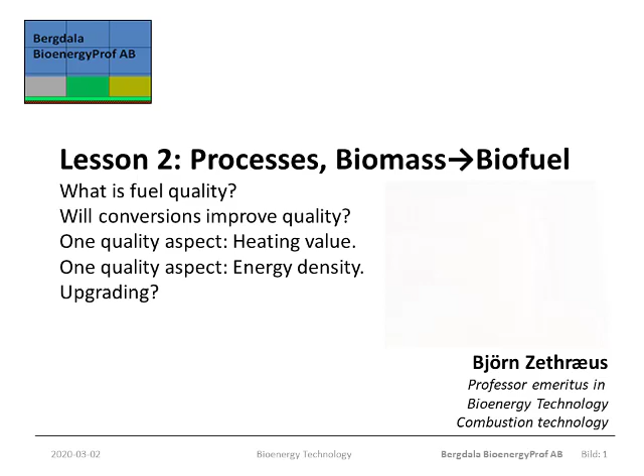So in this nugget we will discuss fuel quality, and especially we will talk about the heating value and the energy density. When you looked in the UBET report in the previous lesson, you will have noticed that there is no specific definition of fuel quality. And that is because there is no such thing as a unique measure of fuel quality. Page 6 in the UBET report will introduce the problem to you.

In the last paragraph on that page, you will read that a major motivation for quality assurance is to fulfill legal limit requirements or to meet technical demands for the power plant. To guarantee these basic conditions, chemical and/or physical parameters may be varied theoretically by crop production processes as well as by harvesting and preparation. Now, to summarize this, we may say that fuel quality is a measure of how well the fuel is adapted to the end-user process demands.

A cheap biodiesel containing paraffins may be a high-quality car fuel in a tropical climate, but not in the Arctic or subarctic region. And that would be because the paraffins will condense and clog the engine at low temperature. Wood pellets is a high-quality fuel if you want to heat your house using a boiler, but not if you want to run an aeroplane.

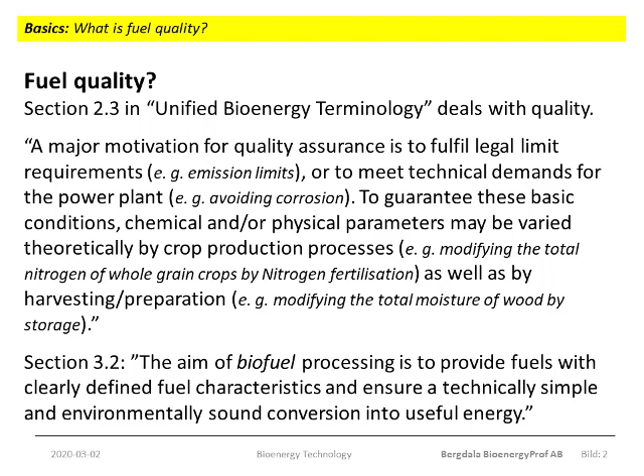The thing is that biofuels are so very diverse. Look back at figure 3 and figure 5 in the UBET to refresh your memory. And then, if you go on to section 3.2, page 11, you will read that the aim of biofuel processing is to provide fuels with a clearly defined fuel characteristic and ensure a technically simple and environmentally sound conversion into useful energy. So what we will do now in this nugget is to concentrate on one important fuel characteristic, namely the concentration of chemically bound energy.

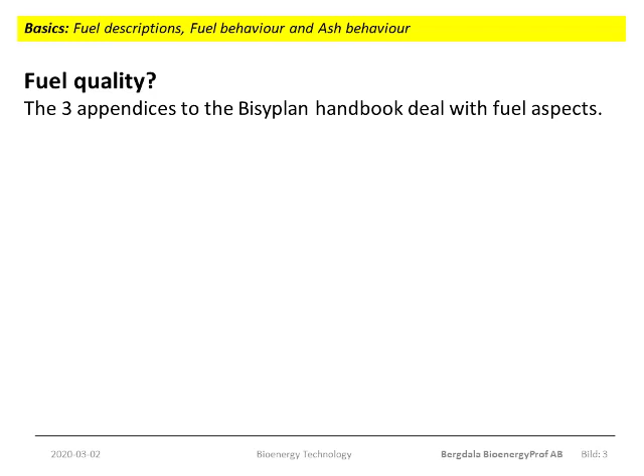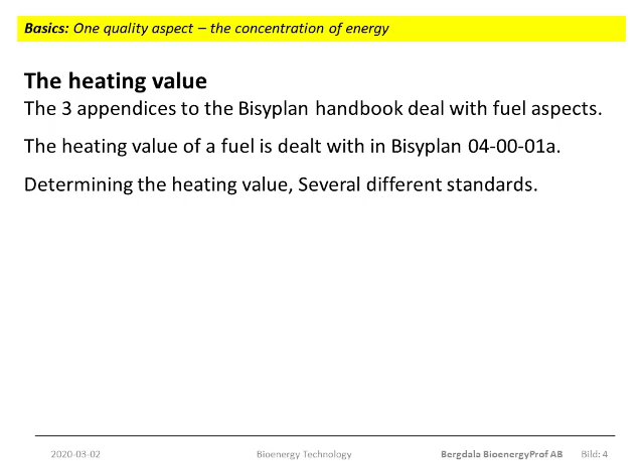But first of all, let me remind you that the Bisyplan handbook appendices deal with fuel descriptions and different aspects of fuel behavior. So, now for the heating value. There are different standards to determine the heating value depending on if the fuel is gaseous, liquid or solid. But there are common and basic things.

First, all standards basically use a bomb calorimeter. In this apparatus a specific amount of fuel is inserted. Then enough oxygen is added to guarantee that all the fuel can be completely burnt. The calorimeter is an enclosed volume that can be maintained at about a constant temperature, typically 25 degrees Celsius.

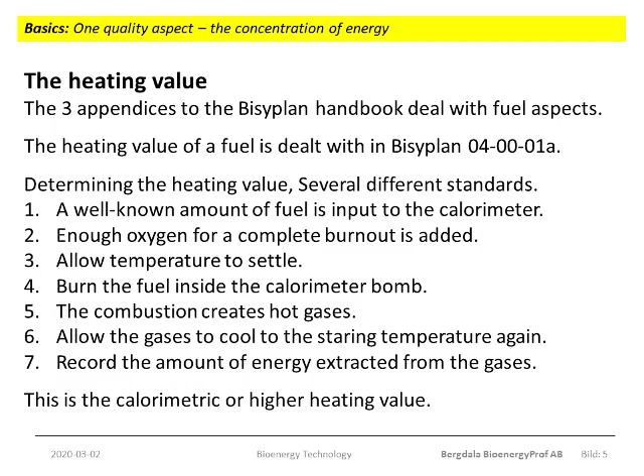The fuel is then ignited and the combustion products are cooled to the starting temperature again. And then the amount of energy extracted from the combustion products is recorded. The procedure becomes slightly different depending on the state of the fuel, but basically this is how it is done. Let us now look at this a little bit in more detail.

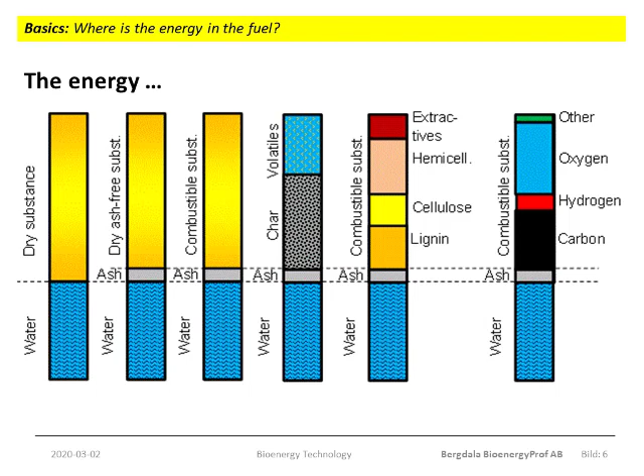Because what happens is that the liquid water in the fuel boils off to form steam, and that will take energy. In the calorimeter the process is started at 25 degrees Celsius, and it also ends at 25 degrees Celsius. When ignited, the combustibles in the fuel will form hot gases, and then the water vaporizes. This requires energy. The energy need is proportional to the water content in the fuel.

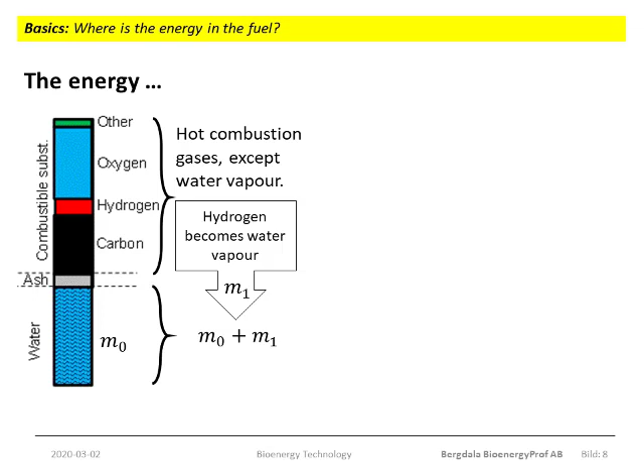The hydrogen in the fuel becomes water vapor during the combustion. So the mass balance for water shows that the total amount of water vapor is bigger than the moisture content in the original fuel. So we count this water vapor together with the vapor from the fuel moisture. But then the whole thing is cooled again. So what we have after that is cold gases and condensed water.

But the amount of water is now bigger than the amount of water we had from start. So the heat released from the condensation is bigger than the heat required for the vaporization. So let us now look at the heat balance.

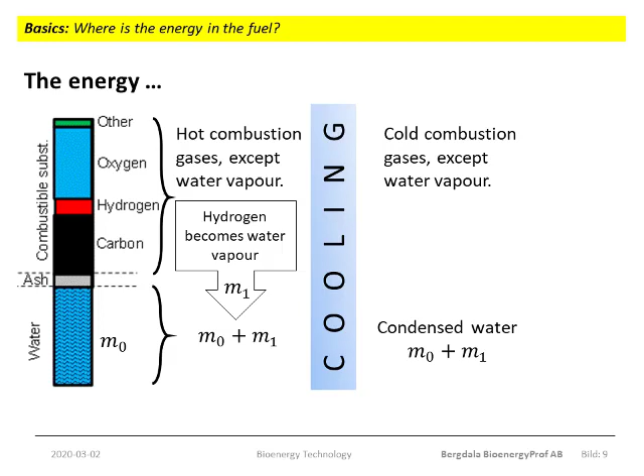As you will see from this slide, the experimental value will give as a result a total energy release from the calorimeter that is higher than the energy contained in the combustible substance. Expressed per mass unit, joules per kilo wet fuel, this value is called the calorimetric or higher heating value.

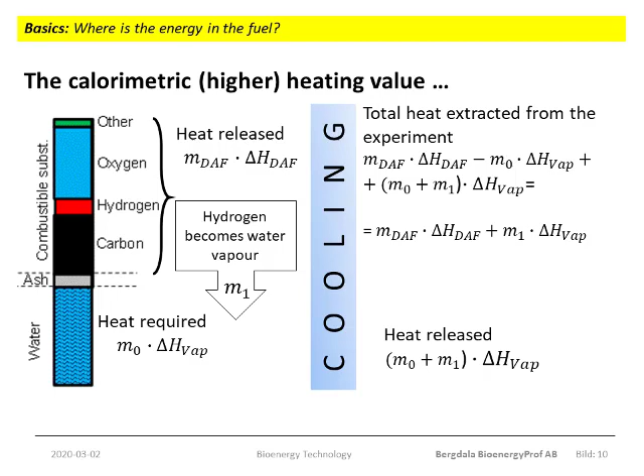This is the amount of energy that could be extracted at the most in case all the water vapor in the combustion gases was condensed and all the condensation heat made use of. But in most real cases the combustion gases will leave the plant in the form of gas, so the cooling is much less. And in that case, there will be no release of condensation heat.

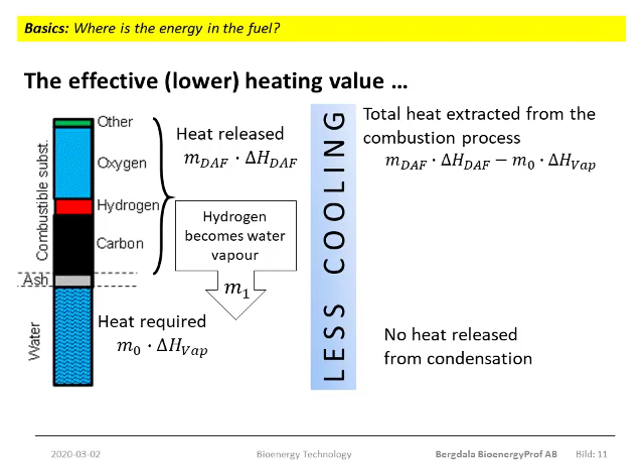Expressed per mass unit, joules per kilo wet fuel, this value is called the effective or the lower heating value. This is the amount of energy that can be extracted at the most in case the combustion products all leave the plant in gaseous form, and this is the normal case. So this is how the experiments in bomb calorimeters can be evaluated.

Different countries tend to have different traditions with respect to these two heating values. Some countries use the higher heating values, others tend to use the lower heating value. In Scandinavia, we always use the lower heating value. So if I say the heating value without any specification, I always mean the lower effective heating value.

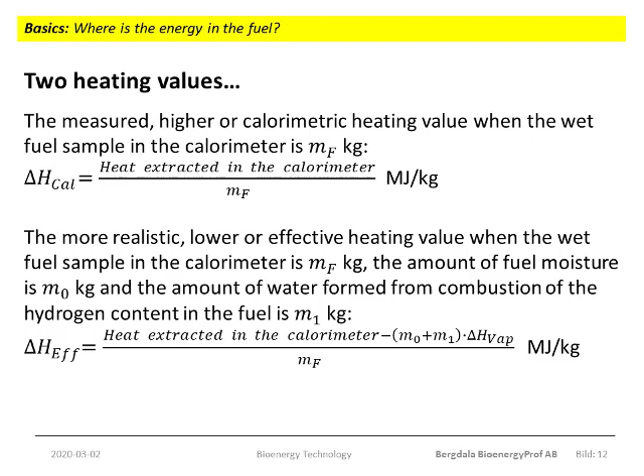And let us now look closer at the equations we have found. What I've done here is to replace the numerator in the two equations from the previous slide with the more detailed expressions. The desired value is the heating value for the dry and ash-free substance, delta H sub DAF. This value is readily available from the measurement.

In the equation to evaluate delta H sub DAF are two values that have to be taken from a fuel analysis. The fuel sample input to the calorimeter will be wet and contain ash. So, to determine M sub DAF, the moisture content and the ash content must be known. And to compute the amount of water formed from combustion of the hydrogen in the fuel, the hydrogen content in the dry ash-free substance must be known.

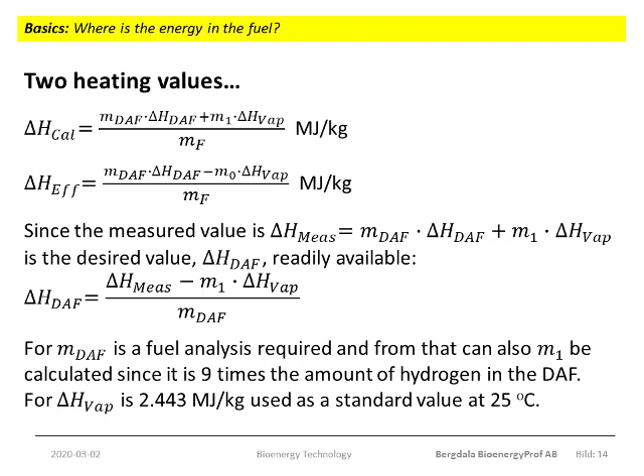Following the fuel analysis terminology as described in the appendix, it is clear that the mass of the dry and ash-free substance is the fuel mass minus the amount of water and minus the amount of ash. Expressing this in terms of fractions, moisture mass fraction F sub W on a wet basis and the ash fraction F sub ash on a dry basis, just as usual, we find the dry and ash-free mass M sub DAF according to this slide. Here, M sub F is the total mass of the wet fuel with the ash in it.

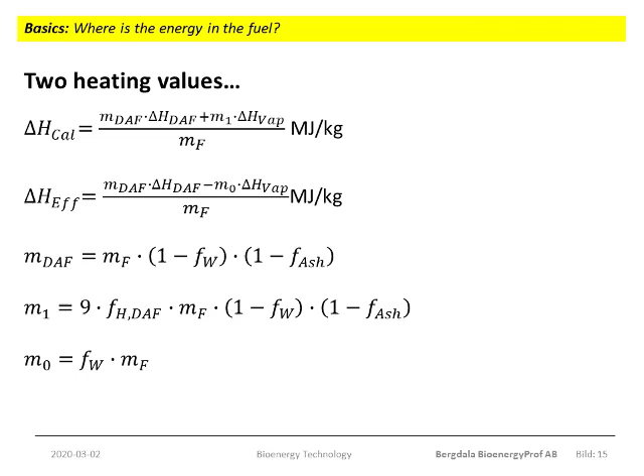The amount of water, M sub 1, from combustion of the hydrogen in the combustible substance is computed from the hydrogen content, F sub H DAF, in the dry and ash-free substance. And the amount of liquid water in the fuel sample, M sub 0, is determined from the moisture content, F sub W. Knowing delta H sub DAF, the ash and water contents and the hydrogen content in the dry and ash-free substance, both heating values can readily be computed. And these equations are general and valid for all types of fuel, solid, liquid or gaseous.

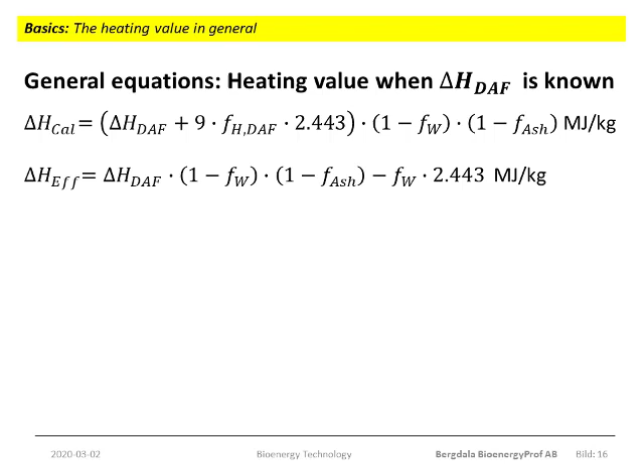It is important to notice that the heating value is always expressed as energy per mass unit. In some cases, it is more relevant to use a volume measure, and the volume-related measure is called the energy density. To obtain a value for the energy density, we have to know the bulk density. The energy density is most relevant when it comes to judging and comparing modes of transport.

In transports, it may happen that there is a specific volume, like a container, that can be filled to the rim, and this volume is the limiting factor. So there is a specific maximum number of cubic meters that can be transported at one go. In such cases, the total amount of energy represented by the fuel in the container will be proportional to the number of kilos that can be fitted into the container. If the number of kilos can be doubled, then the total amount of energy is also doubled.

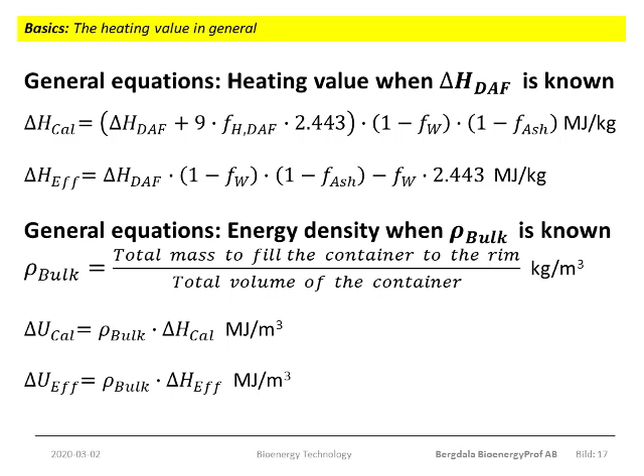The bulk density is the weight of the material once the container is filled to the rim, divided by the container volume. So the way to obtain the energy density is simply to multiply the heating value with the bulk density. In the homework session, we will take a slightly different approach to the heating value, so see to it that you are perfectly comfortable with what we have said so far before going on to the homework.